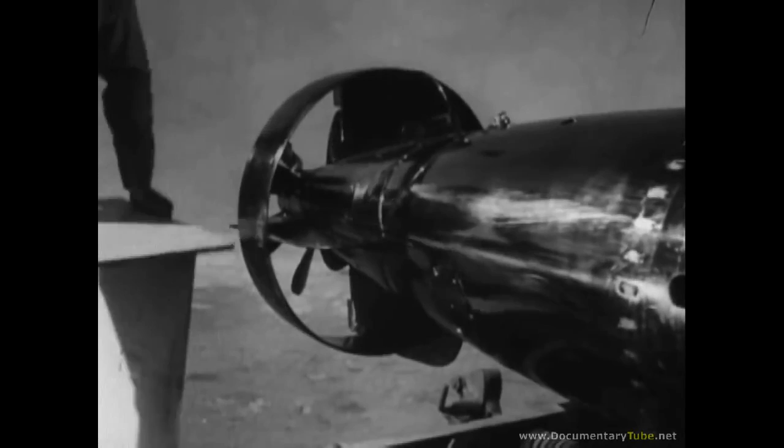All torpedoes of the Mark 13 Mod 6, 7, 8, and 9 type look pretty much like the older models. So what has revolutionized the performance of the torpedo? The shroud ring, commonly called the ringtail, Mark 1 Model 0, in conjunction with a drag ring on the nose of the torpedo, does the trick.

This is a steel ring welded to the guide vanes of the new torpedo. Using this ringtail with a nose drag ring and wooden stabilizer, successful test drops have been made at 2,000 feet with a speed of 350 knots. Optimum performance is obtained at about 800 feet and 260 knots.

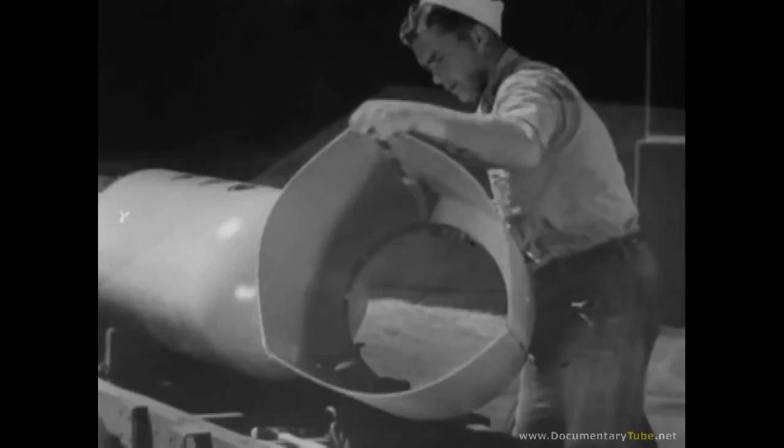The stabilizer is secured to the ringtail with wooden dowels which shear on contact with the water. The drag ring has two primary functions: to aid in air stabilization and to decrease the impact shock about 40% on hitting the water. This is especially useful in cases of extremely high altitude drops.

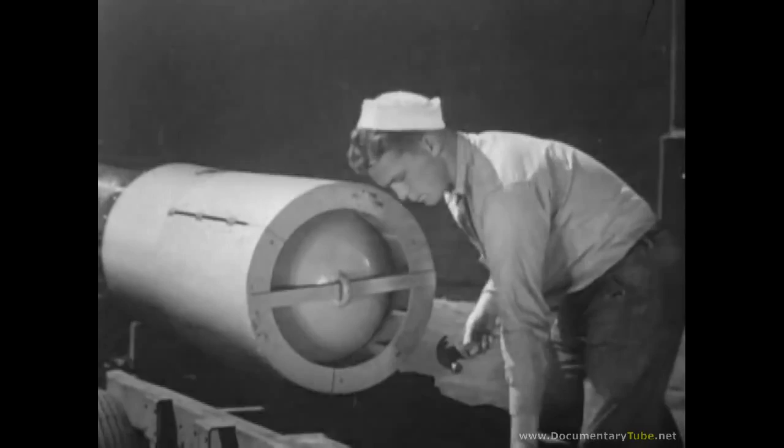In a torpedo drop, any deviation from true air trajectory is liable to cause damage on impact. The drag ring helps to eliminate pitch and yaw. Like the stabilizer, this disintegrates when it hits the water.

A valve, the water trip delay valve, prevents the torpedo turbines from burning up during its long air travel. On leaving the plane, the torpedo operates only on compressed air. Impact with the water trips the valve, starting normal fuel operation. This valve is secured with wire to prevent the airstream from springing it.

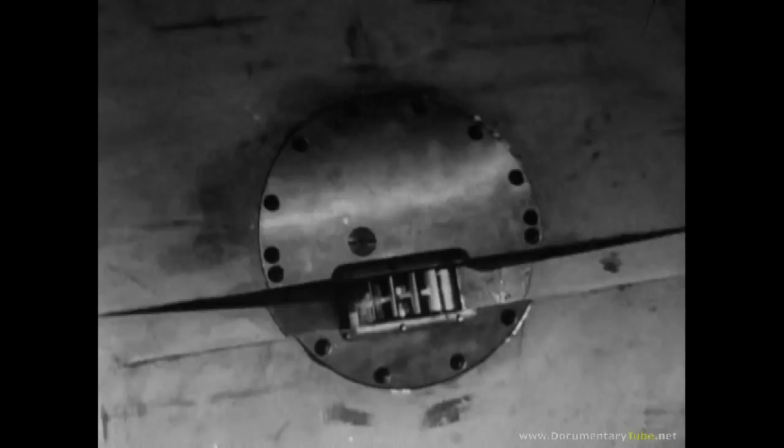Similarly, high speed and altitude make it necessary to prevent the impeller on the exploder mechanism from turning while in flight. A piece of .020 annealed soft copper wire is used. Impact with the water will shear the wire.

At high altitudes and in cold climates, special precaution must be taken to ensure a sufficient amount of antifreeze in the water chamber of the torpedo. BuOrd instructions should be followed.

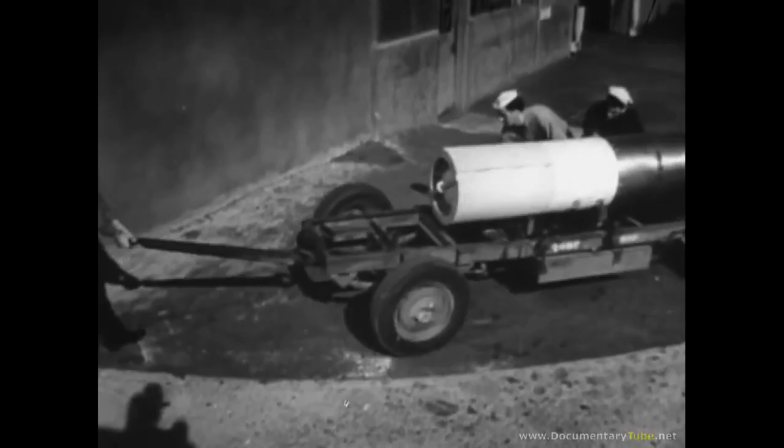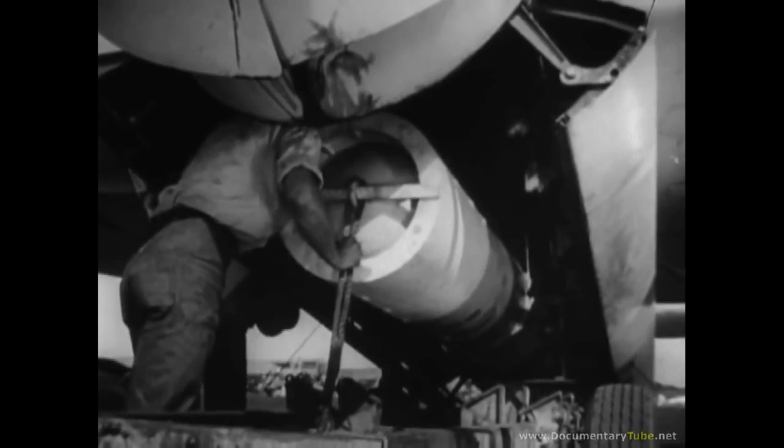With the new BuOrd recommendations enforced, not only will the torpedo be more stable in the air and in the water, with no appreciable broaching or hooking, but initial dives in 85% of cases will be no deeper than 50 feet if the proper entrance angle is used.

Remember that proper depth settings must be determined for the type of target to be attacked. This should be in accordance with tactical doctrine. Depth settings as shallow as 5 feet may be used successfully.

Against armored vessels, it is necessary to set the depth to strike below the armor to achieve maximum destruction. However, take care that the torpedo is not set so deep that it will pass under the target.

Recent statistics show that of 2,000 torpedoes dropped under varying conditions, about 92% ran hot, straight, and normal. And in combat, the percentage of hits with torpedoes is greater than that of any other form of attack against shipping. Experts have figured that the plane is now 40 to 50% less vulnerable to enemy anti-aircraft fire when using the new recommended high-speed, high-altitude approaches.

Torpedoes were formerly dropped at low altitudes and low airspeeds, so air travel was nearly negligible. However, using increased speed and altitude combinations naturally increases air travel.

The old axiom of releasing at 1,000 yards does not hold water. In many cases, the air travel alone is 1,000 yards or more.

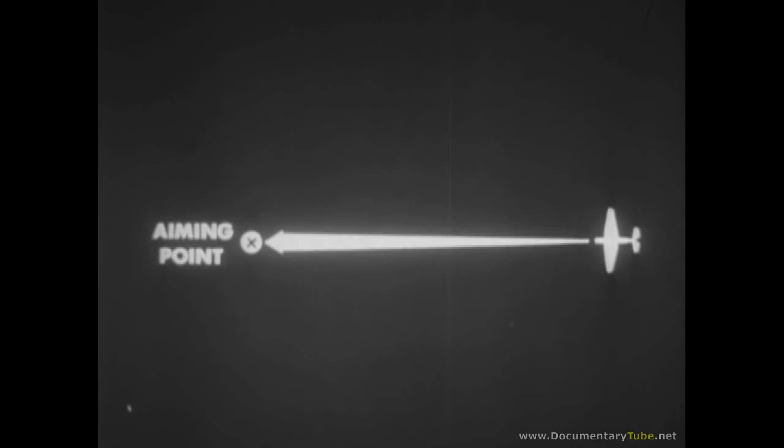At 800 feet, the torpedo takes about 7 seconds to fall. A simple formula works out the rest of the problem. Crosswind effect is equal to the time of flight of the torpedo in the air in seconds times the velocity of the wind in feet per second.

In making allowances for crosswind, the only effect to be considered is that on deflection. The effect on range may be disregarded. Always apply wind allowance on the side from which the wind is blowing.

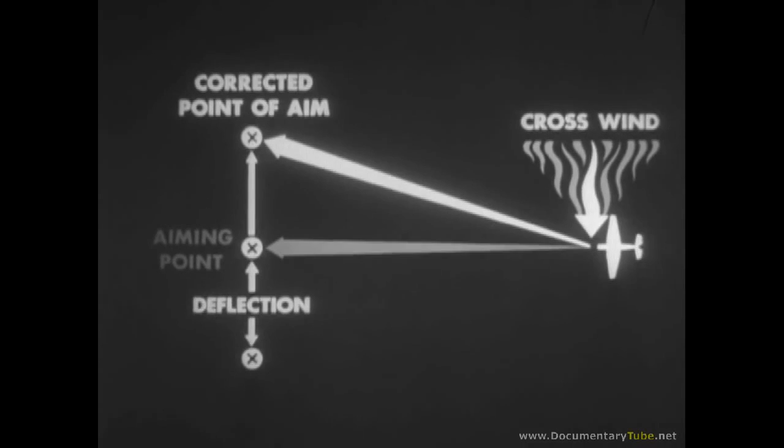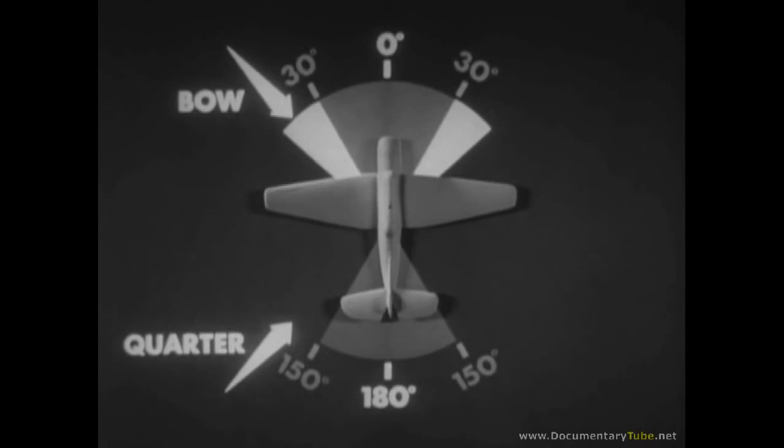Disregard winds with relative bearings of less than 30 degrees or more than 150 degrees. Winds on the bow or on the quarter have only a slight effect on deflection, but winds on the beam may require important corrections which must be made.

The following tables present practical aiming allowances. Mount these tables on cards where they will be easily available to the pilot.

For winds of varying velocities on the bow or quarter, for two different sizes of ships, these allowances in ship lengths should be made. For winds on the beam, note the great allowances in ship lengths which must be made. Get these tables from your instructor and study them.

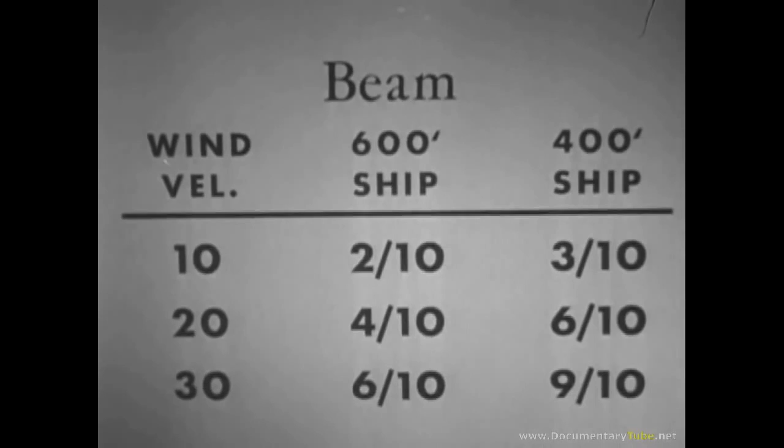Tables for aircraft torpedo sighting and launching data have been prepared by BuOrd and published as training literature by CNO. Let's break down Table 4 and see how it works.

Altitude of 800 feet, estimated target speed 20 knots, and its length about 600 feet. Aiming point is 1.15 ship lengths ahead of the bow. Your own ground speed is 260 knots.

Slant distance to point of impact should be 1,457 yards. Entrance angle of the torpedo will be 27 degrees and 20 minutes. You are approaching with a target angle of 60 degrees, so your radar slant range from the target at point of release should be 1,590 yards.

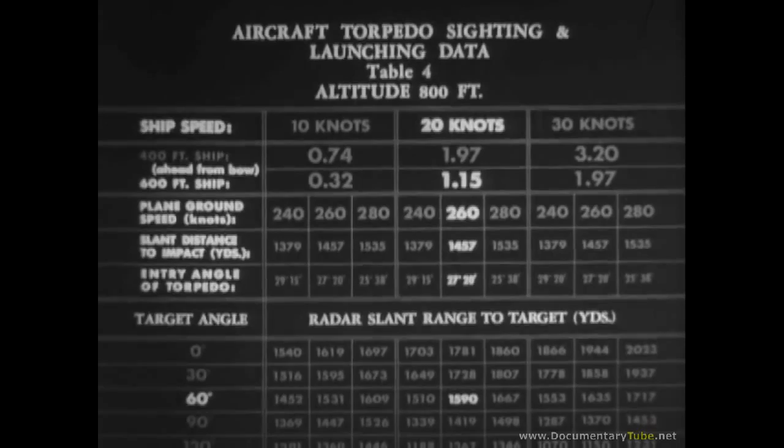Problems with other factors can be worked out in similar fashion. This chart should include data for shallow water drops, using these combinations of airspeed and altitude of release. Here, speed in knots is roughly equivalent to altitude in feet. Radar slant ranges are roughly 700 yards less than those recommended for open sea drops.

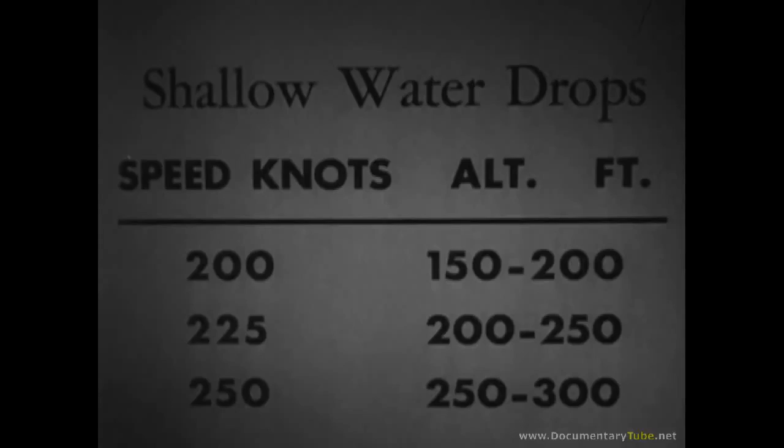The toughest part of the new aiming problem is releasing the torpedo at the proper range. Primary dependence must be placed on radar ranging until the pilot becomes proficient in visual ranging.

A tactical use of radar for torpedo dropping can be to locate the target and commence the approach above the clouds. Then dive through the clouds to make a visual attack.

Another possible use is attacking anchored ships, using radar for ranging as well as locating, with a drop through the low overcast.

A torpedo pilot may in general drop and hit within a wide band of ranges. But if the range is too long, the torpedo water run will be longer than desired, and the average torpedo speed will be consequently slower, so that the torpedo may pass astern of the target or allow the target sufficient time to maneuver away from the torpedo.

Likewise, dropping at excessively short range is just as bad, since the torpedo will hit the water too close to the target and so cannot be properly armed before hitting the target, if it hits at all.

To emphasize the importance of ranging, look at what happened in one combat mission. The returning pilots reported that they had dropped at ranges of between 1,000 and 1,600 yards, and at altitudes of from 275 to 300 feet. But actual photographs proved that the ranges averaged 2,800 yards and the altitudes 190 feet. What a waste. And naturally, there were no hits.

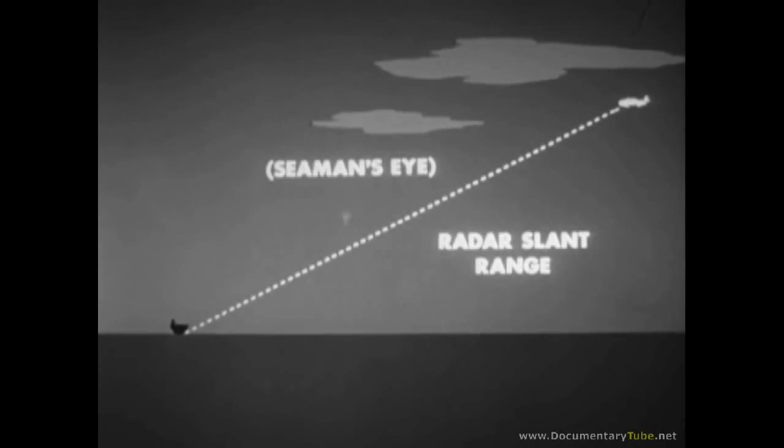The seaman's eye method developed by training often must be used, although with a new torpedo, altitude control is not too critical except in shallow water drops.

The full range of entrance angles is 18 to 22 degrees for shallow water, 22 to 32 degrees for open sea or deep water. Naturally, the extreme should be avoided if possible.

If an entrance angle under 18 degrees is obtained, say 12 degrees, the result of a speed-altitude combination of 200 knots and 80 feet altitude, the torpedo may be seriously damaged and ricochet or broach violently. If the controls are damaged, as they probably will be, the torpedo may sink, or at least have an unsatisfactory run.

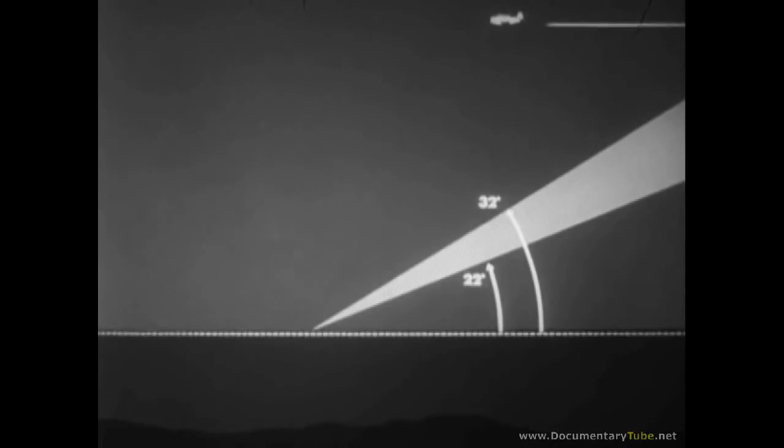If the entrance angle is steeper than 32 degrees, the usual result of dropping from high altitude at low speed or dropping in a glide of over 10 degrees, not only is there the danger of the torpedo hitting bottom because of the initial deep dive, but the torpedo may stub its toe, which may cause structural damage or damage the steering mechanism, causing premature sinking or a very erratic run.

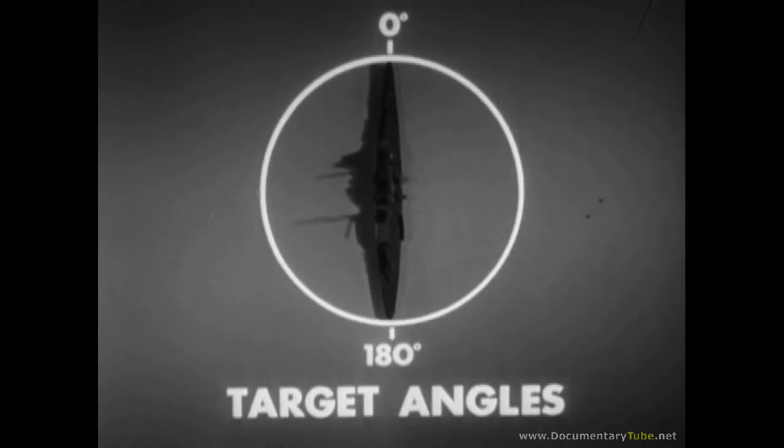Target angles are between 0 degrees and 90 degrees, since attacks from abaft the beam should be avoided whenever possible, because a fast-moving target can run away from the torpedo or maneuver to comb the torpedo tracks. In any case, small errors in range estimation on stern shots will cause misses that might have been hits with the same error on bow shots.

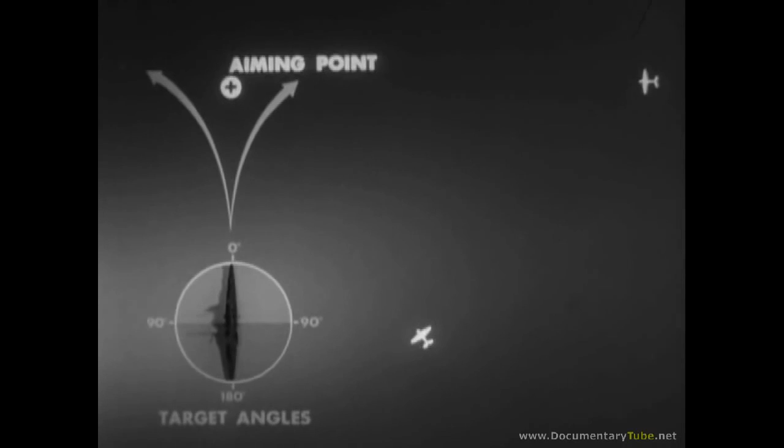Also, stern approaches will expose pilots to AA fire for a longer time, as closer drops must be made. Obviously, it is best to drop at an angle where the longest target is offered to the torpedo at impact. Perfect conditions would be a drop in which the torpedo ran at an angle of 90 degrees to the path of the ship at contact, or as close to that as practicable.

If you want to hit them, you have to lead them the right amount. The range to the aiming point depends on the air and water travel of the torpedo. The range to the target varies with the target angle and speed, and the range to the aiming point.

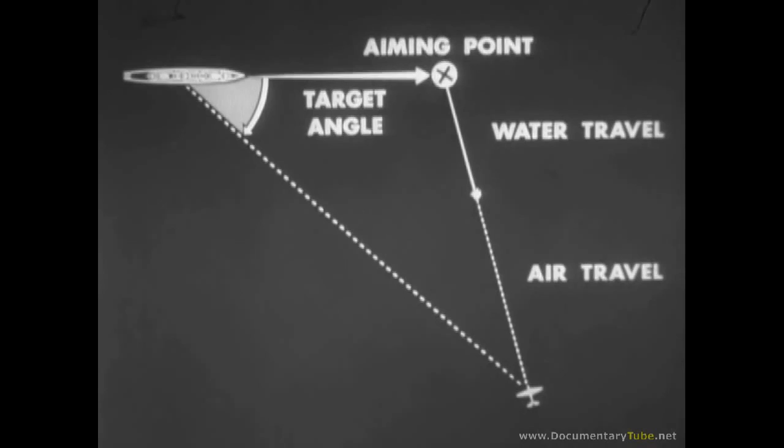By previous training, the pilot should be able to automatically estimate his own altitude and speed. Aiming problems are now comparatively simple: observe the target length, speed, and course, and from this, select the aiming point.

Then estimate the range to the aiming point. The target angle controls the range to the target, and this can be used to assist the ranging to the aiming point. Keep a rough check on the target angle, using radar and seaman's eye to check the slant range to the target.

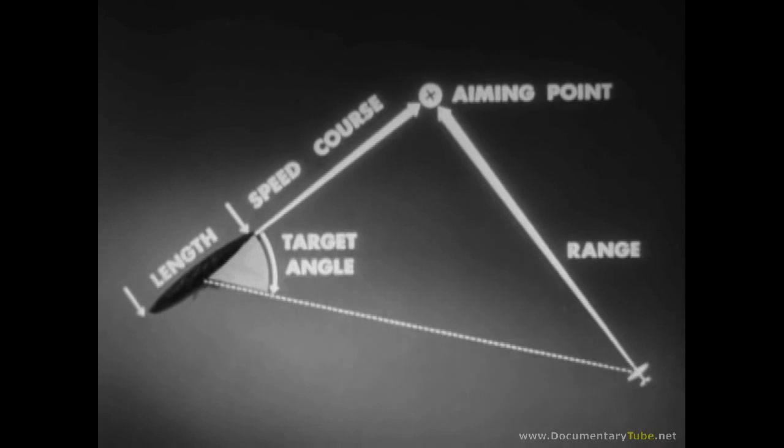The actual ship lengths to be allowed for are measured from the bow of the target vessel along the course line extended to the aiming point, which is the center of the ship at the intended point of contact.

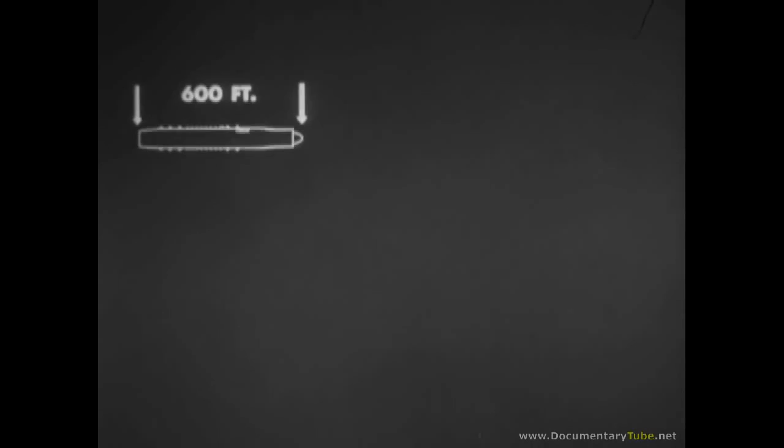Assuming an underwater run of 400 yards with a proven new torpedo speed of 32 knots, here is a thumb rule that can be applied against a 600-foot target on a steady course, wind force 0. For 20 knot speed, aim 1 ship length ahead. For 25 knot speed, aim 1.5 ship lengths ahead. For 30 knot speed, aim 2 ship lengths ahead.

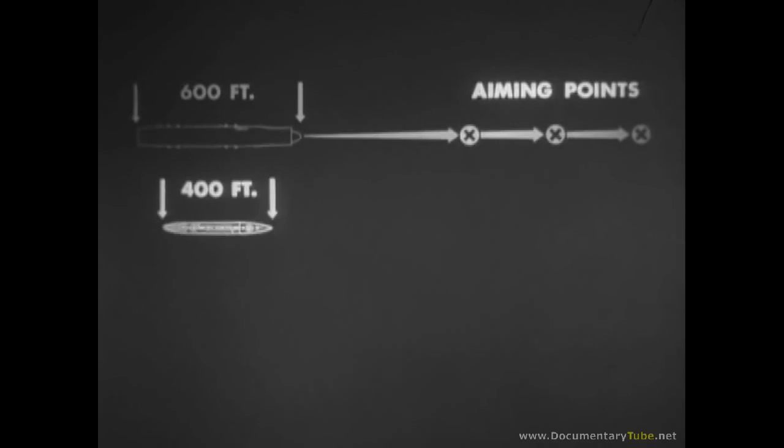For a 400-foot target vessel under similar conditions, the aiming allowance is 1 ship length more than for the 600-foot target. It figures out that 1 ship length should be allowed for each 10 knots. So for 20 knot speed, aim 2 ship lengths ahead. For 25 knot speed, 2.5 ship lengths. For 30 knot speed, 3 ship lengths.

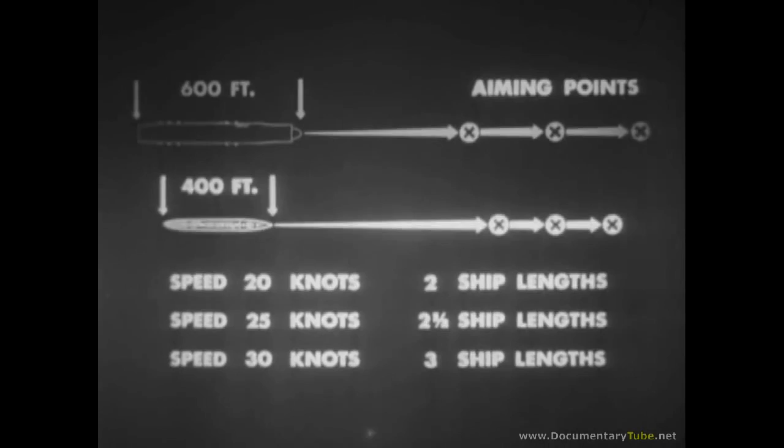Study enemy ship characteristics and data on bow waves and wakes to determine speed. Under torpedo attack, it can be assumed that ships will use full power in attempting to maintain top speed. However, remember that any ship will gradually lose speed in a sustained turn. This loss is important and must be considered.

Circling ships will have a deceptive wake due to the churning of the propellers and the position of the rudder. When selecting aiming points for maneuvering targets, 3 additional factors are involved: the direction of the turn, the degree or rate of turn, and the decrease of speed of the target in the turn.

In this example, assume that the target is in a developed turn and is using full power and full rudder of 35 degrees. The aiming point depends upon the ship's actual speed in the turn and must be measured from the bow along the ship's curved path extended. The curved wake indicates this path.

In general, large ships capable of 30 knots at full power and continuing to use full power in the turn will decrease speed by about 12 knots after a 90-degree change of heading. The ship will then be able to maintain about 18 knots as long as it continues in this turn. The destroyer class of vessel loses only about 5 knots of speed in a similar turn.

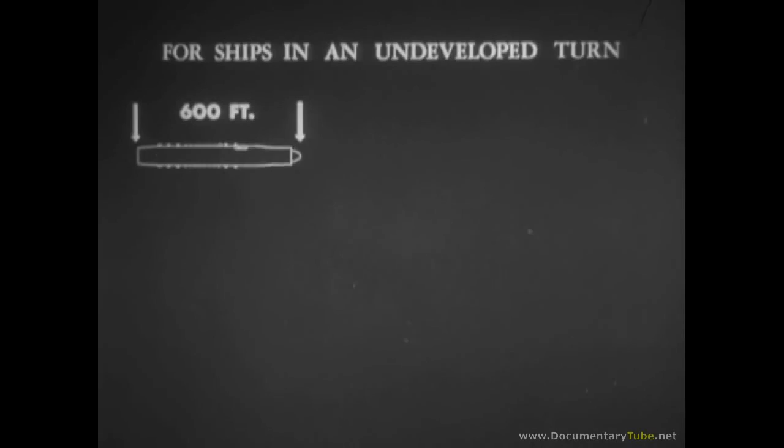If the target is just commencing its turn, the loss in speed will be only about half of that lost in a developed turn. In this type of turn, an undeveloped turn, in general, the aiming point is almost identical with that used if the target is on a straight course.

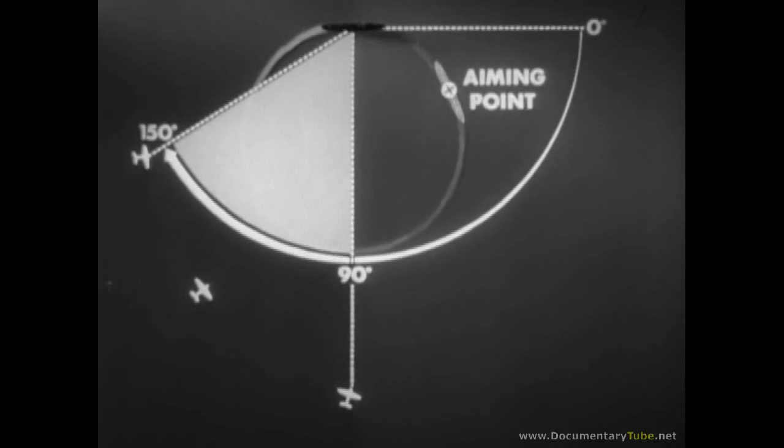For attacks on a turning target, the best target angles are on the outer bow from 0 to 60 degrees. On the inner beam, the best target angles are between 90 and 150 degrees. In any case, the actual target size presented to the torpedo is the controlling factor.

For a U.S. Navy light cruiser using full rudder of 35 degrees and 30 knots initial speed, it takes the rudder about 23 seconds to become fully applied, and about 10 more seconds for important changes in the ship's heading and position to take place.

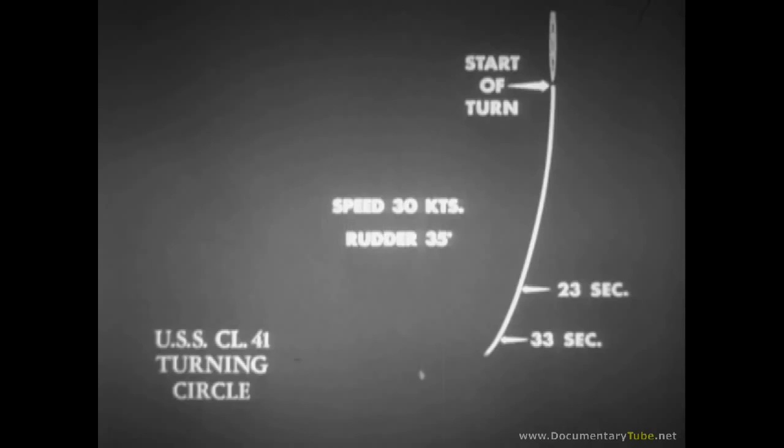The use of high speed and correspondingly high altitudes naturally calls for entirely new tactics, and therefore a new concept of training, so that the pilot is equipped with the knowledge and experience to put these new tactics to use.

Training for torpedo dropping should follow a fairly definite pattern. First of all, study and talks with experienced pilots and crewmen. All available BuOrd publications and official dispatches should be considered carefully.

The pilot should then commence training with dummy runs. After making proper dummy runs checked with the F-46 camera, he should then use concrete blocks or dummy torpedoes. This can be followed by live torpedo drops, all with single planes. As many torpedoes as possible should be dropped.

Statistics indicate that for best efficiency, the average pilot requires at least 6 single live drops before graduating to group work. Strengthened exercise heads, as provided by BuOrd, should be used.

Sections of 3 or 4 planes should then work together, followed by practice with divisions, then with squadron attack, winding up with coordinated attacks with fighters and dive bombers. In each case, whether single planes, sections, divisions, or squadrons are used, dummy runs should be made in sufficient number to ensure best results for the final live runs.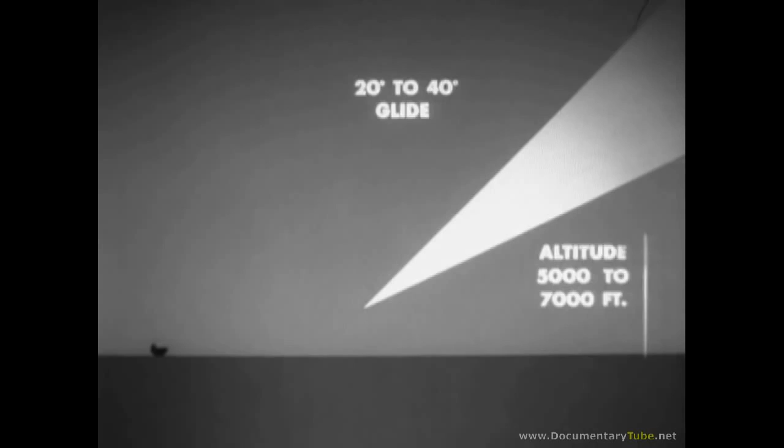The new technique of torpedo dropping makes it almost imperative that the final torpedo attack be initiated in a glide of 20 to 40 degrees from no less than 5,000 feet altitude. The range will then be about 3,500 yards.

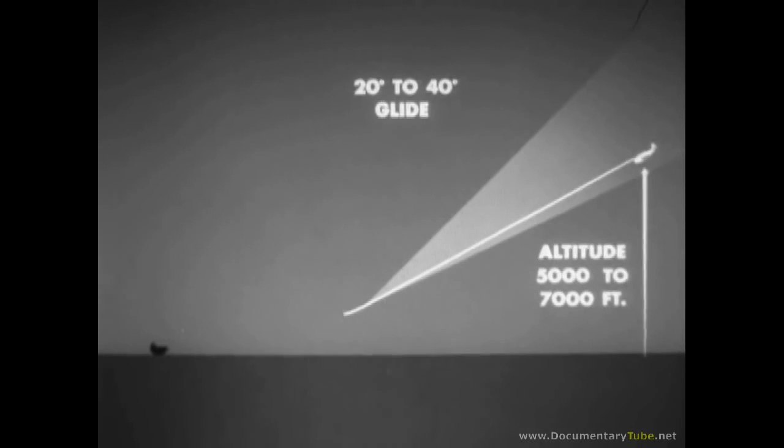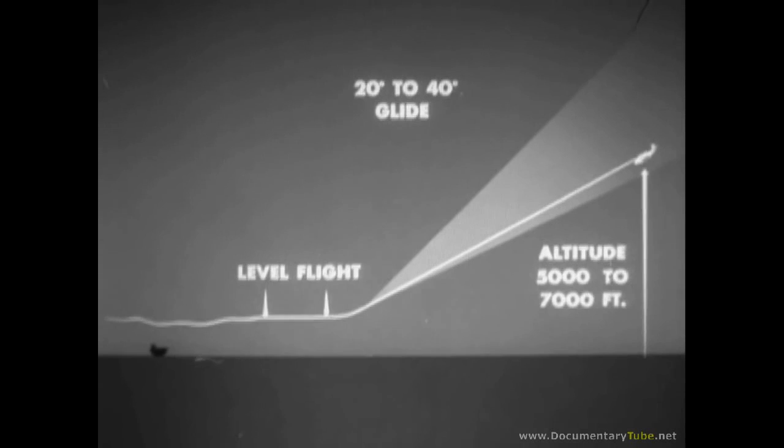As the plane approaches the correct dropping range for the speed and altitude combination selected, it is pulled up to level flight momentarily and the torpedo released. Drop should be from level flight, although it is permissible to drop in a glide of not more than 10 degrees. But note that this will affect the air travel.

However, good performance does require that the wings be level and that the plane not be in a slip or skid at the moment of release.

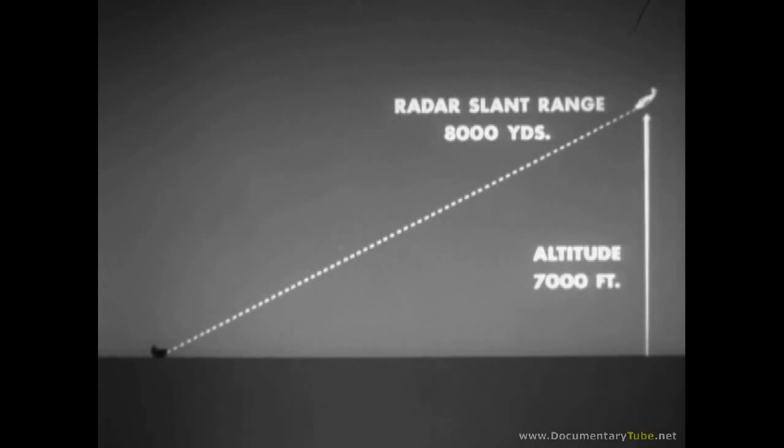For an example of good technique, suppose the final glide is commenced from an altitude of 7,000 feet and 8,000 yards radar slant range. The pilot selects a point about 1,500 yards short of the target and commences his approach as if he were going to glide bomb the point selected.

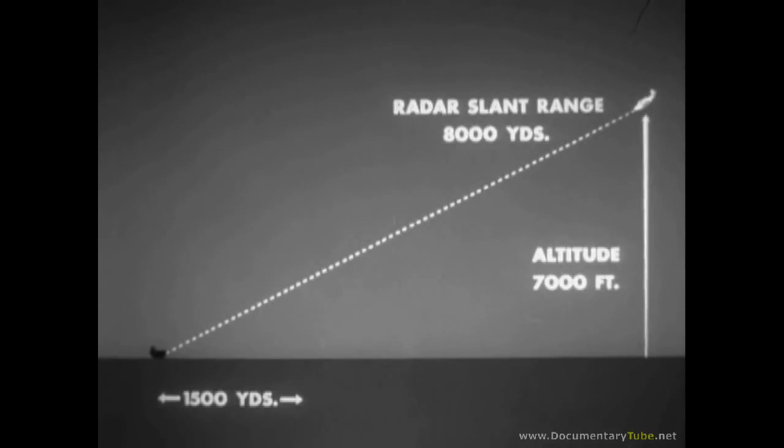The resultant glide path will be roughly 30 degrees during the glide. Speed approaches 300 knots.

Target maneuvers are offset by changing direction of glide as necessary. Flying to the release point selected, the pilot maneuvers the plane without wasting any time so that its flight, course, and his aiming are exactly correct when the release point is reached.

The pilot decides he will release at about 800 feet. Around 2,000 feet and 2,500 yard radar slant range, he commences a smooth pull-out.

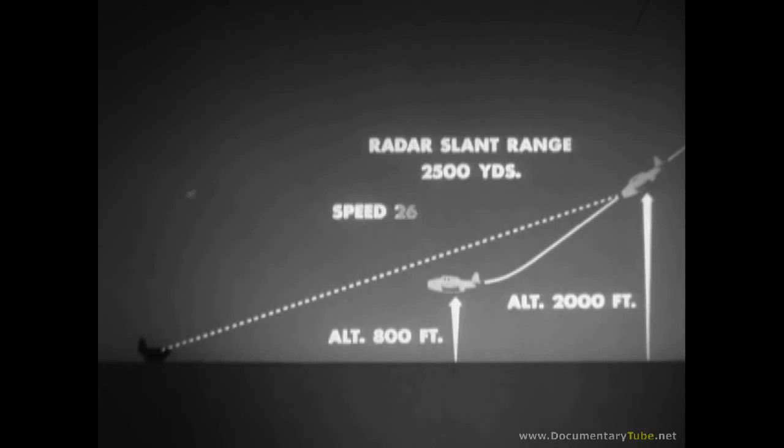The plane should be leveled off and ready to release the torpedo about 800 feet altitude and 260 knots, with a radar slant range of 1,500 yards. As a general rule, pilots commence attack too far distant from the target, resulting in a final low, slow approach.

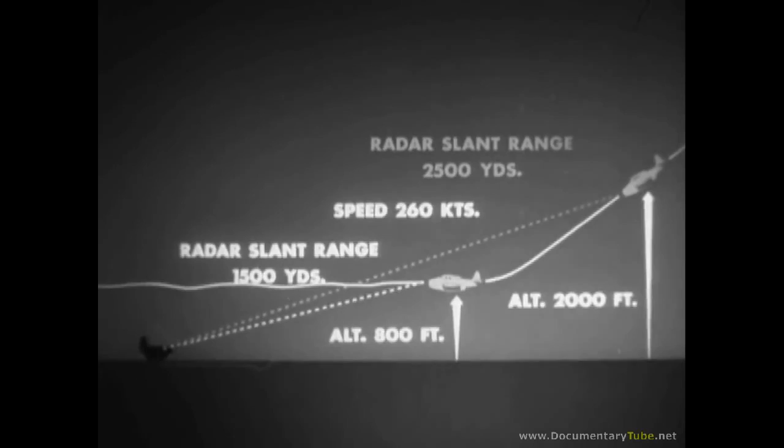Planes other than torpedo planes will adjust these tactics to their own individual performance possibilities. An SB2C with dive flaps can make a steeper dive, leveling out just before dropping. Tactical advantage and surprise can be effected by utilizing approaches almost the same as dive or steep glide bombing.

This type of attack has interesting possibilities and should be exploited fully.

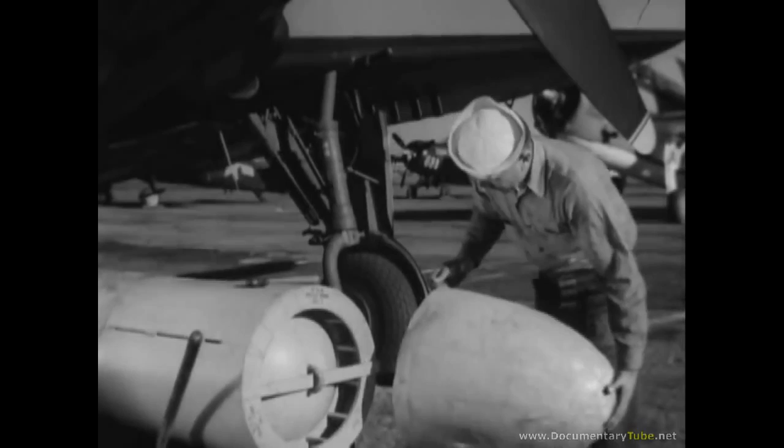When the torpedo has an external installation, this nose cap reduces much of the speed lost due to wind resistance, thus increasing combat range. This is accomplished at small sacrifice in air stabilization and small cost in damping out initial shock.

All torpedo attacks must be coordinated with attacks on the major targets and screening vessels, using one or all of the following: dive bombing, strafing, or rocket attack. Unsupported torpedo planes should never attack well-defended ships.

High-speed and high-altitude approaches by torpedo planes require much less time to complete than the method formerly used of losing altitude well away from the target and coming in low. This requires that commencement of the torpedo attack be withheld until bombs are actually dropping.

If torpedo attack is supported only by strafing or rocketing, both attacks should start simultaneously. The VF attack is pressed in quicker, and if they hesitate at all, they will be too late.

This is not only for diversion, but some anti-aircraft guns may be put out of commission, and possibly the torpedo planes will be offered a target whose speed and maneuverability has been greatly reduced.